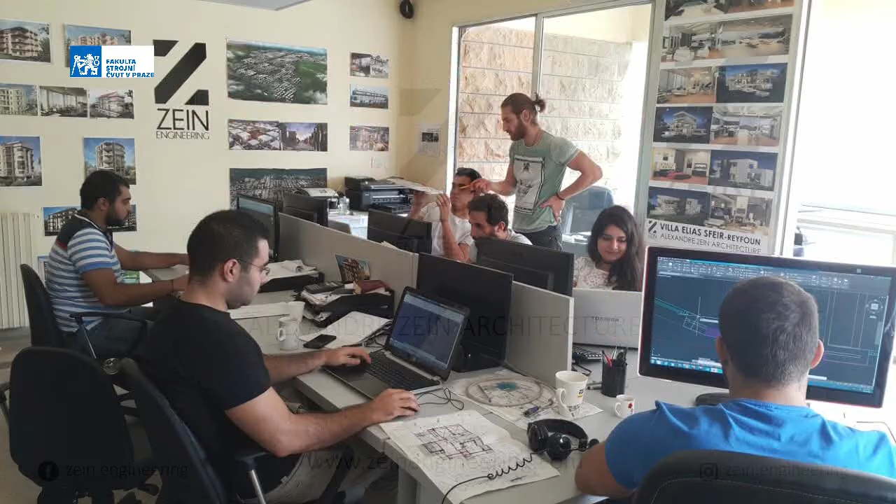As you know, in architecture, having something built is rare. So this is the office in Lebanon. Of course, architecture is never a solo act, so generating a good work environment is vital for a collective team effort. And we fly back 5 years ago. That was me during my graduation project day. Well, I looked so young back then, I still look the same I guess. But this project was the catalyst that woke my awareness about the real meaning of architecture.

That it's not about the physical object. Architecture is about human aspiration and the adaptive response to a need, in a way that the role of an architect is to be able to adapt a selfless architecture to any situation. And it's inevitably too powerful that its impact has the ability to manifest itself to change people's lives. So most of the prevailing flamboyant projects are limited to the small percentage of privileged people who actually have enough money to make great buildings, while the biggest percentage lies on the poor.

Here's the thing: architecture is for everyone, for every single human being. So we need to be able to work with scarce resources and inspire people with smart strategies, as well as give the best out of a specific budget. So in this lecture, I'm going to show you how we responded to several assignments, from a high-end architecture built for the rich to small cottage shelters built for homeless refugees.

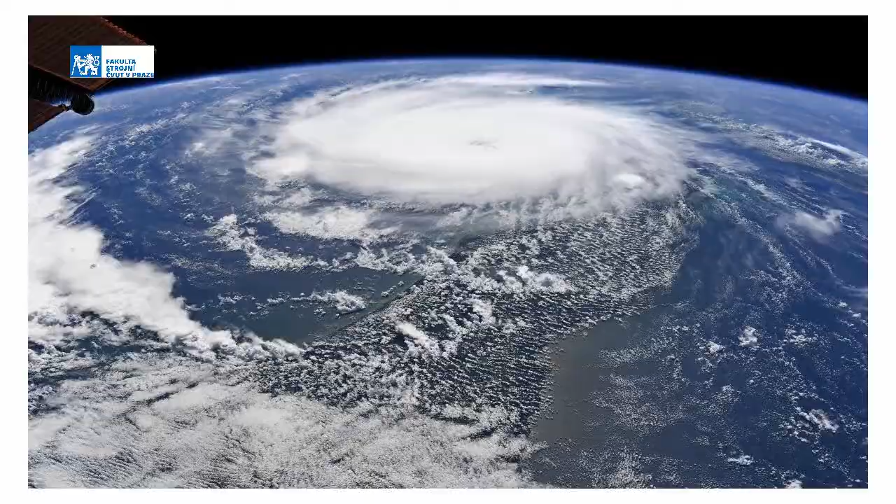So we live in a world that has never found peace. There's always a war somewhere, there's always natural disasters going on. So humanity often faces incidents that disrupt lives, whether it was caused by humans in war, refugee crisis made by conflict policy, or by natural disasters such as earthquakes, tsunamis, floods, etc. And this is a recent example here. This is a photo taken from the International Space Station 2 months ago. This is Hurricane Dorian, considered one of the smallest examples among endless other man-made and natural disasters that caused more than $165 billion of economical loss worldwide.

And the result, we have more than 65 million people displaced in the world, in which 20 million are refugees. And 40% of these 20 million are Syrians. And by the year 2050, it is estimated that the number of immigrants could exceed 200 million refugees in the world. And this is where they live.

Informal settlements, slums. Just imagine yourselves living in here. And the large number of this group, they live in UN tents in which the walls that separate them from the outside is a thin flex sheet that's barely sufficient to protect them from the intense outer climate, so they don't have access to the basic needs and facilities that struggle to provide the simplest aspect, much like what is needed for animals, or even less.

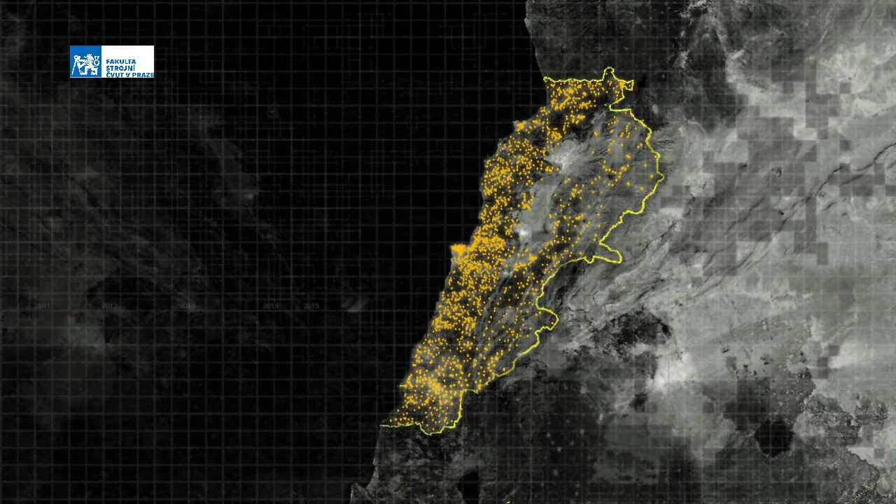So, in that sense, emanating from my senior project in 2015, this is when in Lebanon we faced an influx of 2 million refugees, almost like 1/3 of our population, and we couldn't bear this influx. So I said that this time it's not about the building, it's not a question of a spectacular architectural design, yet it's a question of humanity. And then I thought to myself that if I had to create an intervention for this issue that is seemingly tailored only to Lebanon, we're going to be facing the same problem over and over again in some other parts of the world. That's why we introduced systems in architecture, and these systems, they don't belong to a particular place, yet they adapt to belong to the whole planet.

So 2 years later, we won the Project Earth 2 competition. We were asked to imagine these refugee camps as the cities of tomorrow somewhere in Europe, almost like a changing structure that would grow, adapt, and develop, and to break the isolator lines separating both communities.

We did an intervention in East Germany, since it suffers the collapse of communist-era industry, which sent employees, especially the youth, fleeing westwards, with a sharp decline in birth rate and an average age surpassing 45. So the smallest communities are bleeding residents, thriving for inhabitants. Simultaneously, Syrian refugees are thriving to inhabit somewhere, so it's a win-win situation.

So the idea is to weave both communities by creating an open settlement that will allow refugees to build their own settlement, their own environment, but of course they have to follow guidelines and sets of construction rules given by the encoded system.

The project must be implemented in a vast agricultural area, not far from German communities and forsaken factories. It was sited in Weimar, Thuringia, since it's relatively fertile, and 48% of the surfaces are used for agricultural production. It's also in proximity to leftover infrastructure and forsaken factories, so there's a sort of reclamation of post-industrial landscapes, where refugees squat these leftover infrastructures to bring them back to life.

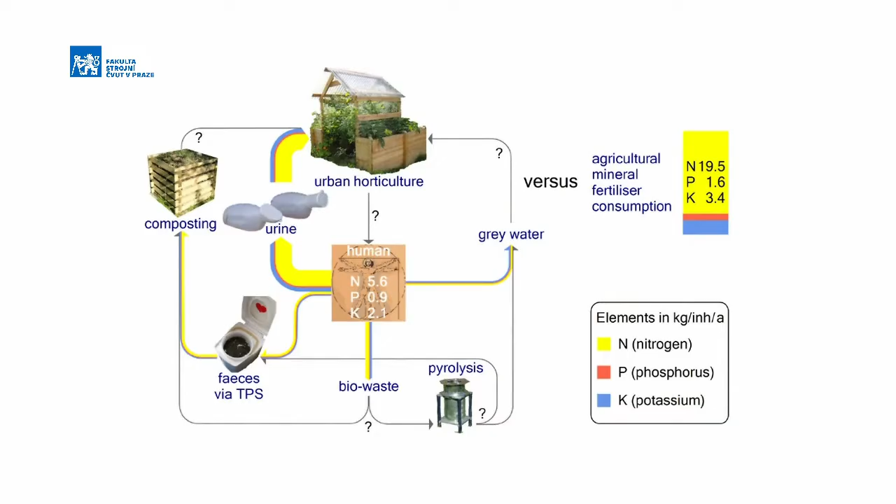So we have a core and four plug-ins that float in an uplifted structure, so we can protect the shelters from flooding, reserve space for infrastructure, and keep the land safe for future uses. We also grow some perennial plants that will repel mice and small animals.

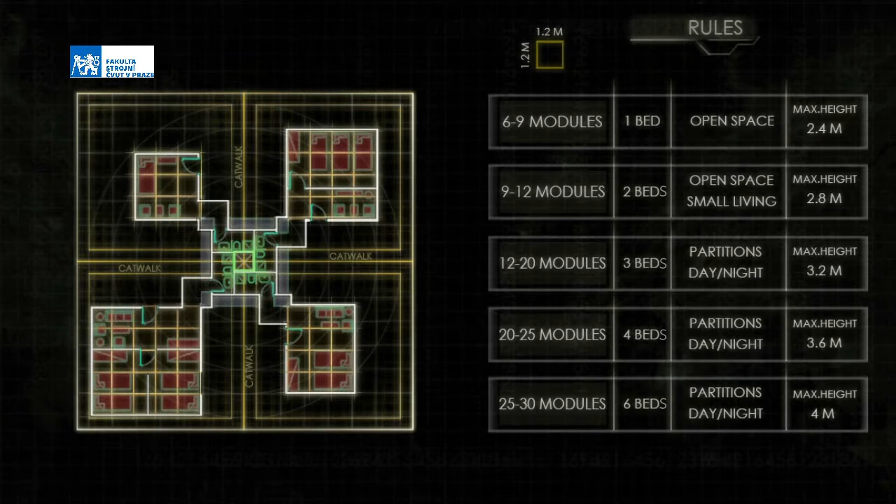These are the rules and standards we encoded, which refugees shall follow while building the shelters. For example, 6 to 9 modules is for 1 bed for 1 person, 9 to 12 for 2, it's an open space, and so on. In that sense, we can simulate an infinite number of typologies that could possibly be built by them. So we never designed the shape - we actually designed the process that would generate the shape.

I firmly believe that studying the way nature solves problems will give us a lot of answers. That's why the structural element used for the skeleton of the shelters are bamboo canes taken from nature, since they're strong, cheap, lightweight, sustainable, and flexible.

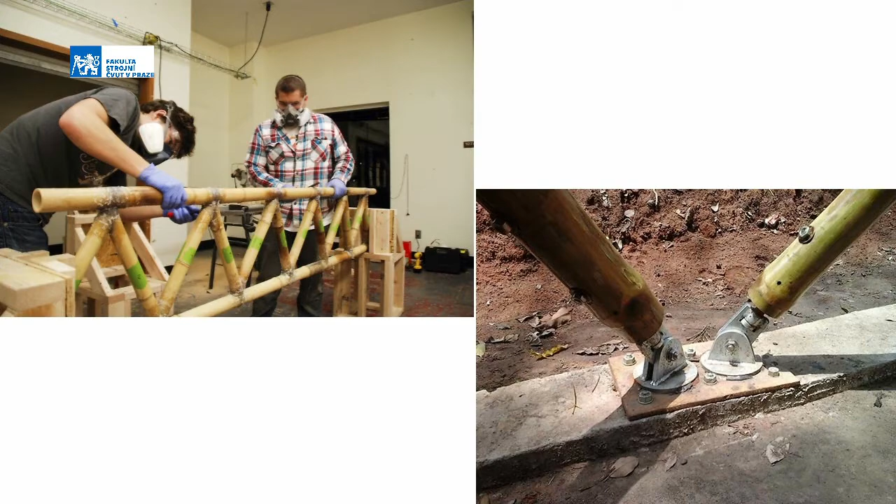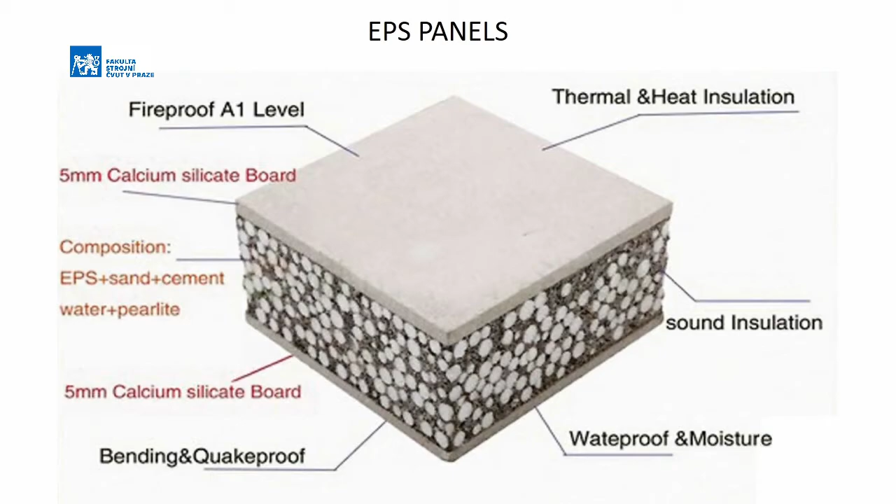But of course we have to treat them, encode them, so they can be easily transformed and modified. As for the walls, we use lightweight EPS panels, since they have some structural capacity, insulate well, and are sustainable. For the furniture, we use recyclable reinforced paper panels.

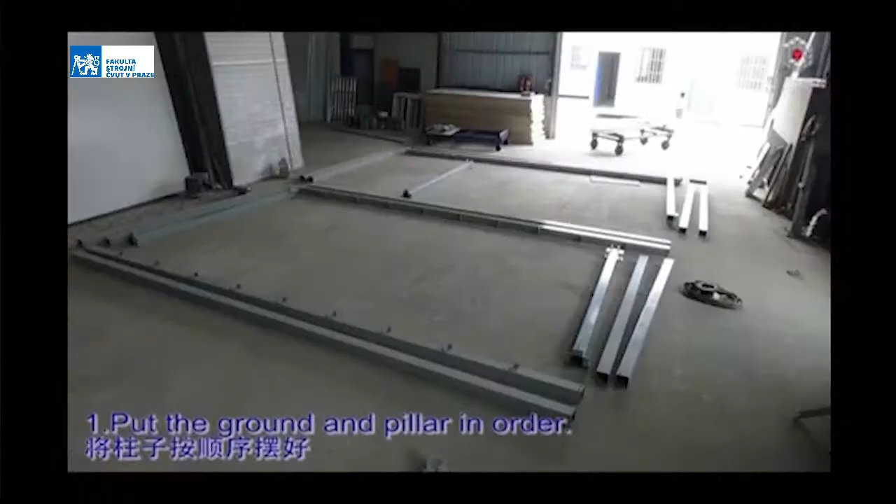So the construction of these shelters is very easy - it's just like building a tent in a forest. What's really interesting is that it can be built in one or two days, so they can cope and rebuild immediately, and get back to their own resources to maintain regular life and social functions.

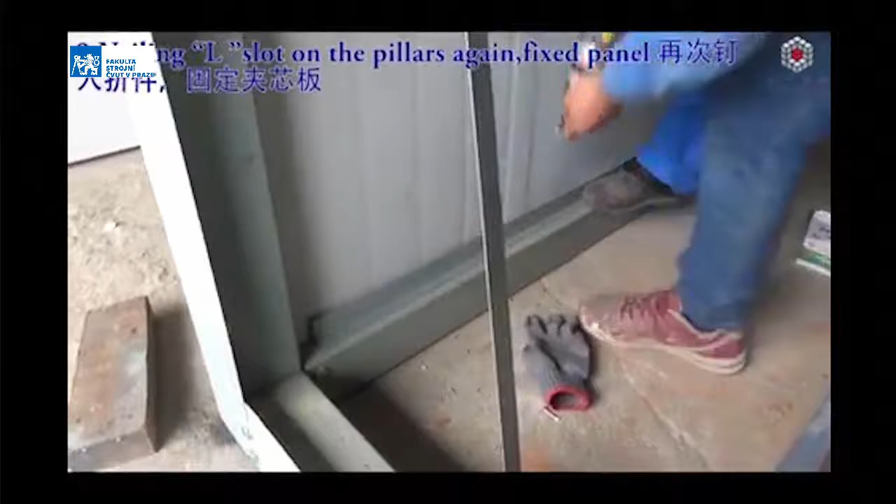As you can see, they build the columns and beams, then add the sandwich panels in various forms and different materials and ways, leaving places for openings, doors, and windows. We provide the refugees with all the materials and tools, and they just assemble things following the guidelines.

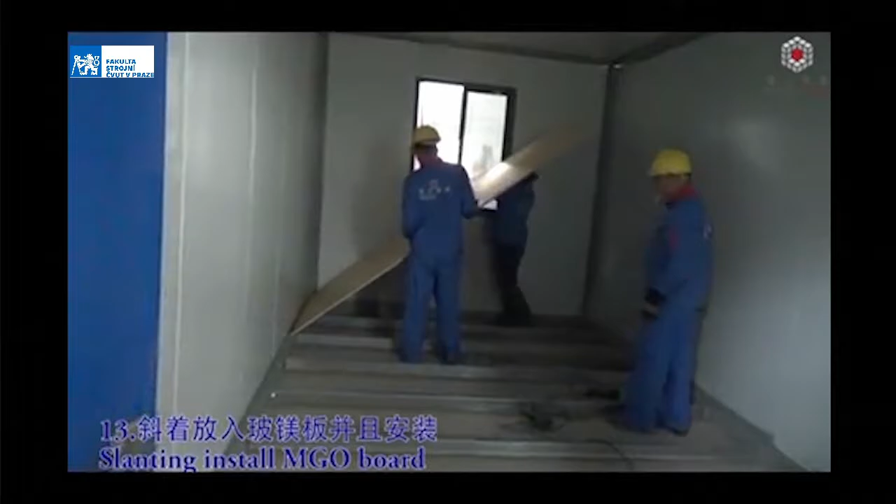But there's also this important phenomenon called schooling - refugees learn easy techniques in a socially active manner. That's essential, so there'll be a sort of corps of trained builders that will train others, and then the system will spread.

So it's a permanent temporality instead of a temporal permanence. So for a precarious population, you need a theory for the growth and for the shrinking so we can delineate the matrix. So we use the theory of fractals, because it describes the theory of nature as a self-organizing system.

This is when we explore the same pattern in different scales. So the part looks like the whole. It's like a never-ending pattern.

So in that sense, we have the cell, we have the core, and 4 plugins. We have 4 families, which makes it a clan. So by simulating 4 clans with another core serving 4 clans, we'll have a sub-tribe. And 4 sub-tribes will give us a tribe. And 4 tribes will give us a confederation, and so on.

So it's a never-ending pattern. Part looks like the whole. You can see the same cell in different scales.

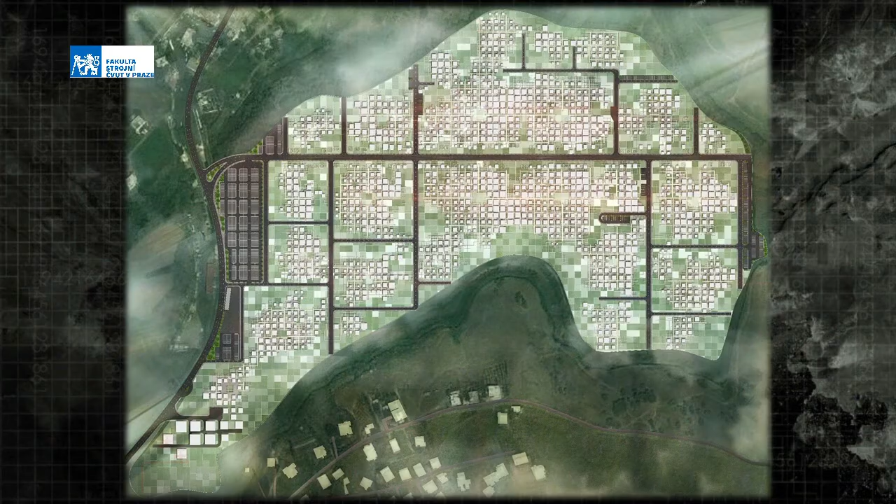And of course, the result is you have different clusters with different proportions in the constellation, leaving sort of negative spaces where refugees harvest their own food, produce their own agriculture, and have some sort of businesses. So we can never say this is the final shape or final output of the master plan, because it's continuously changing. But of course, we have rules following it.

So this is the project from the bird's-eye view. And it's a self-sufficient settlement. It has to comprise all the needed functions for it to survive. So you need schools, kindergartens, commercial shops, health centers, etc.

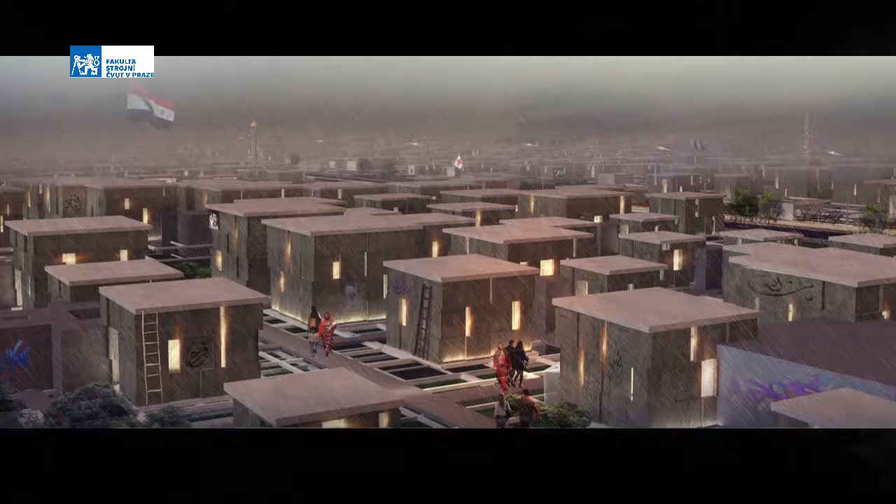And as you can see, we're still building for the poor. We're building for homeless and hopeless people, but still we find aesthetical and spatial qualities. So it's as valuable as an ultra-expensive building. This is our role as an architect: to give the best for everyone.

So the aim was to revitalize the place that once used to be a public destination for medical services, without mislaying its actual function, which is the parking lot. And they asked us to create a greenhouse on it so they can harvest medical plants.

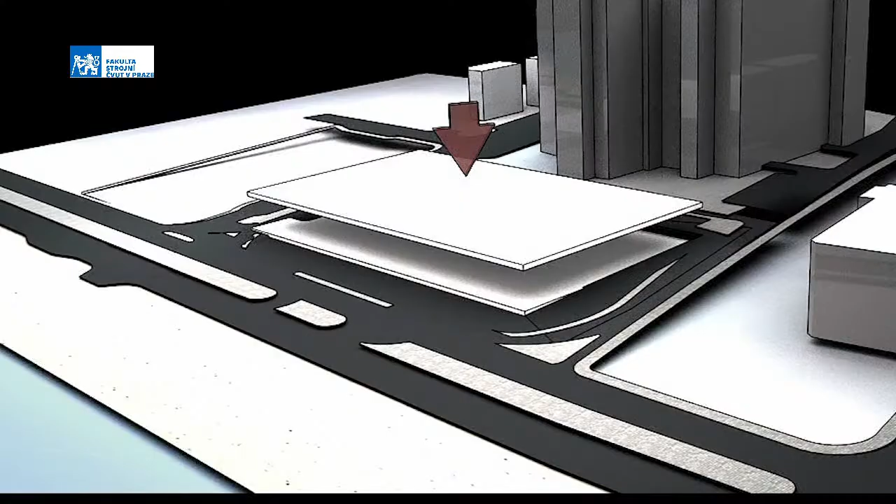So we thought that instead of keeping the same structure as is and trying to establish a public space that doesn't actually blend with the parking lot, the idea was to shift the whole structure to the underground, leaving the ground level freely open to the vibrant city.

In a way that the public space and the gardens and greenery will be mixed together under one canopy, so a microclimate shall be created inside these spaces that are leveraging the connections to the city. So we got inspired from a plant cell.

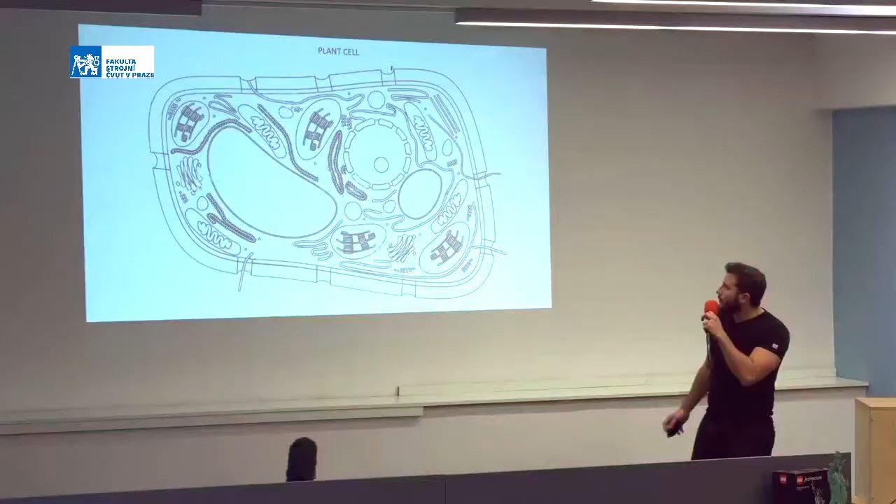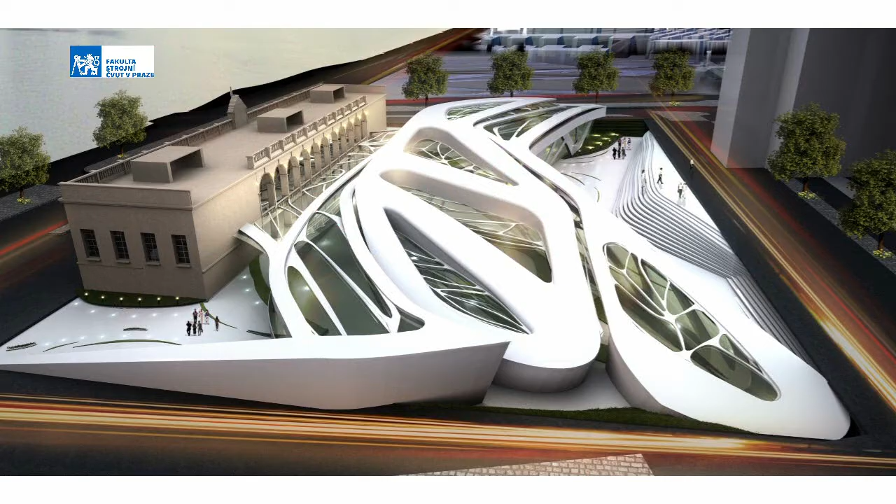Inspired by the cell, the future projects itself from the old arches, creating some sort of contrast between the old and the new. And the perforated canopy blatantly retracts itself to create shades for the pedestrian on one hand and direct sunlight for the plants on the other hand.

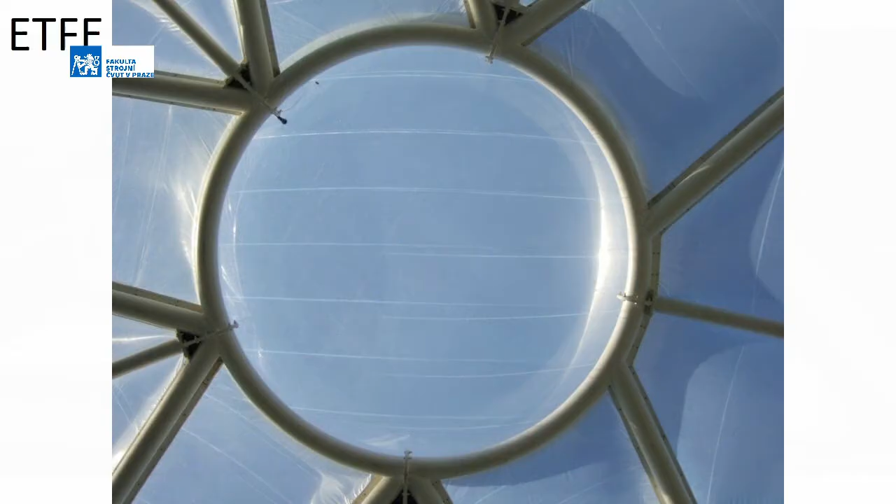So we didn't use glass. Instead, we used a high-strength polymer, which is 1% the weight of double glazing, so it adapts well to the high temperatures of Kuwait.

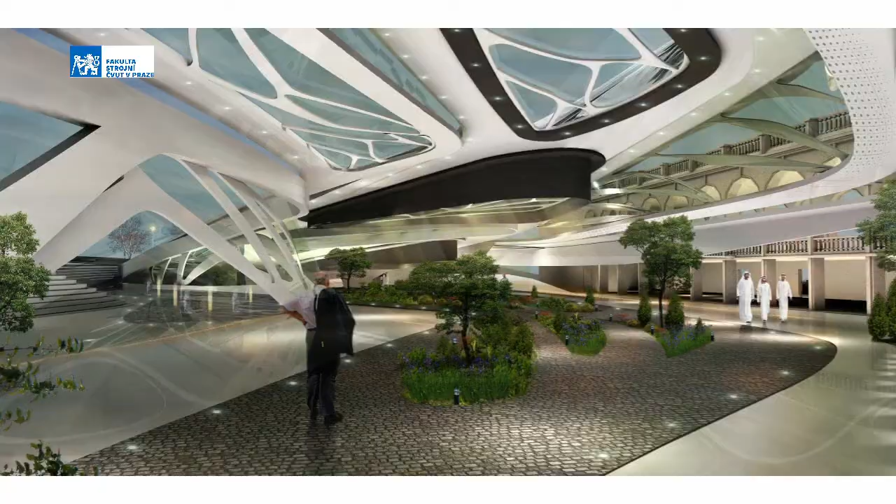So the metabolism of the project provides the end user with a natural microenvironment and delicate spaces in a way that people could meet and walk and sit amidst thousands of trees and plants, and they're going to be healthy and happy and comfortable. And now we're working on the construction documents of this project.

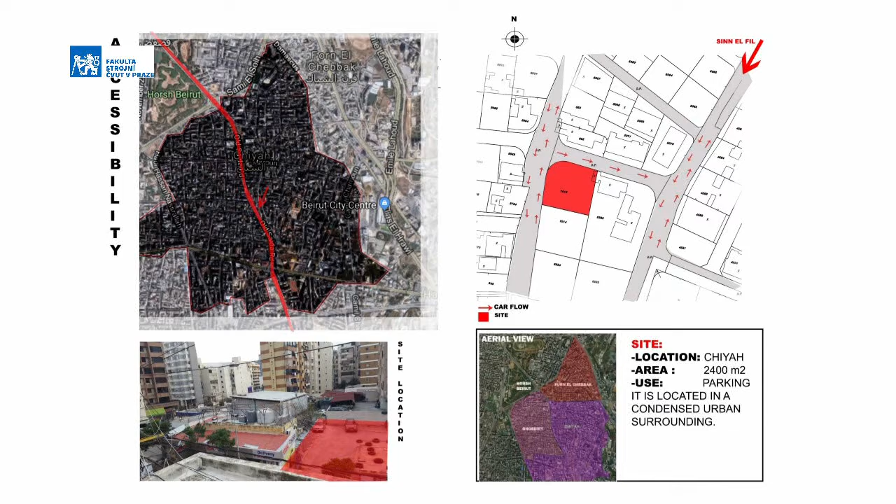Moving on to Lebanon, my country, particularly in Beirut, the capital, in a very dense, bustling district called Chiyah Ain Rumane. This area faced 15 years of war, resulting in devastated and unfinished structures. In the last decades, investors attempted to replace these structures with commercial residential blocks, and the result is that we nearly have 2% of greenery in the area, with a very high level of pollution and no public space. Usually in Lebanon, private space always remains private.

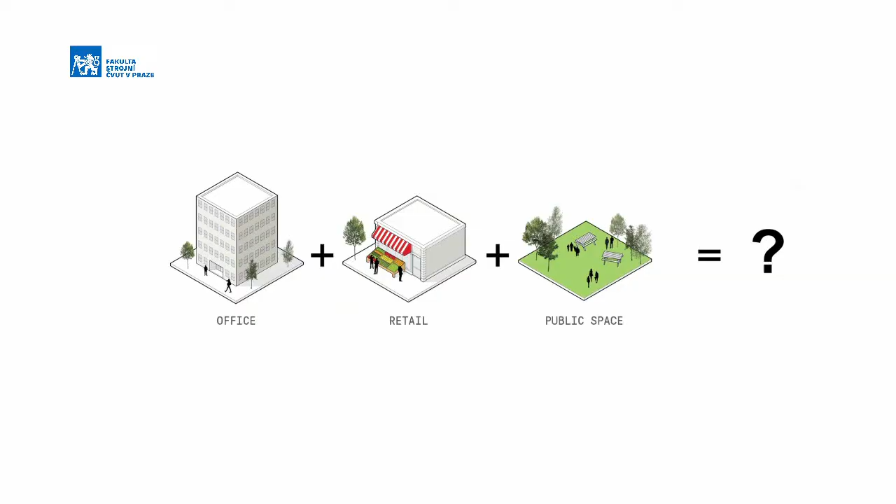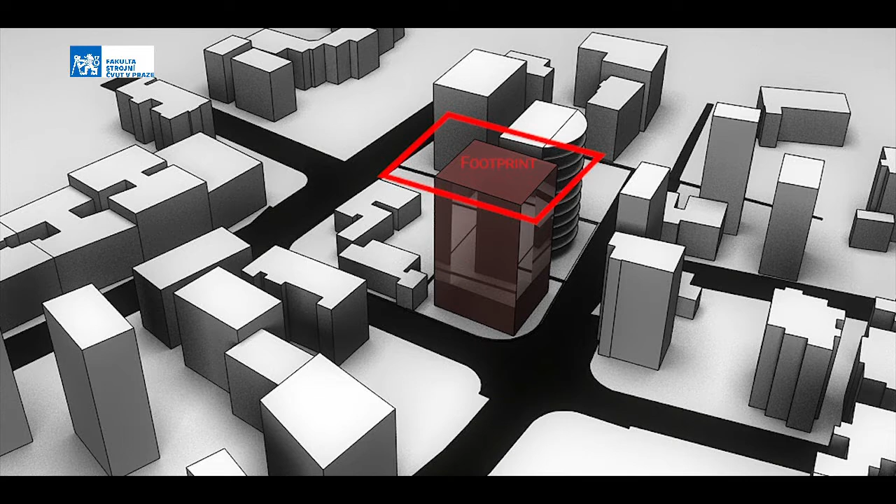So in this case, we miraculously convinced the client to create some sort of public attraction by introducing retails and coffee shops, as well as gardens on the ground level and offices on the first and second floors. Instead of taking the maximum footprint like investors do so they can have as many apartments as possible, we minimized the footprint and went higher. By going higher, you can benefit from the amazing views of Beirut, and you can also have negative spaces for public attraction down here.

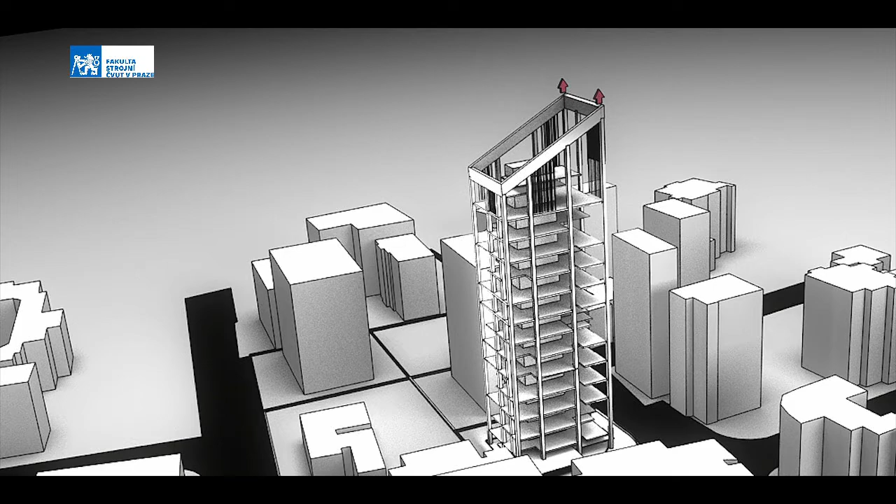In order for us to retrospect all the unfinished structures of the area, we brought the structural elements to the extremity to be part of the architectural design. In order to neutralize the excessive exploitation, we subtracted parts of the nude slabs, creating motion across the facade and double levels for the greenery. On top, we deviated the structure so it could remind us of the resilience of Ain Rumane. So a simple, rational building has greenery that surpasses the 2% of the district.

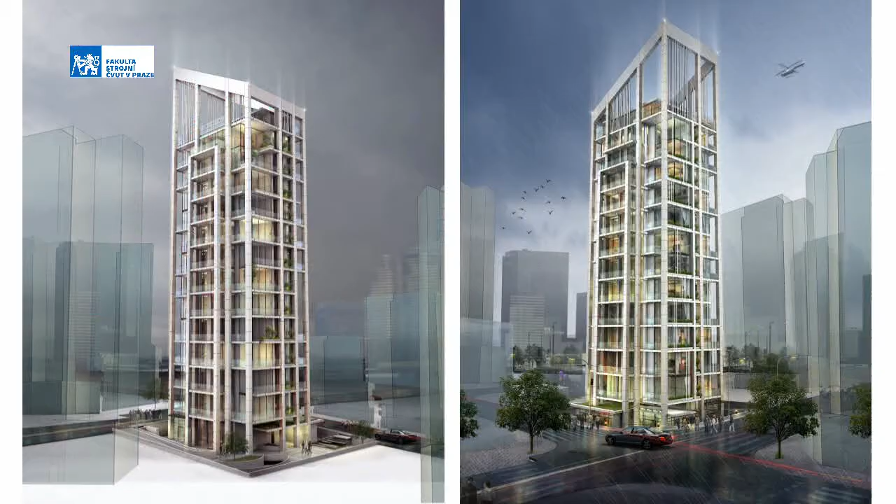As you can see, this is the building, and this is a rendering. The building imposes itself as an inspiring landmark element that brings positivity to the context. As for the structural elements, we cladded it with ACP panels so we could give it a strong character that would remind us of the period of our time. We recessed all the glazing systems in a way that the winter sun goes into the apartment, while the summer sun creates shades within the apartment. So these nude slabs outside act as shading devices.

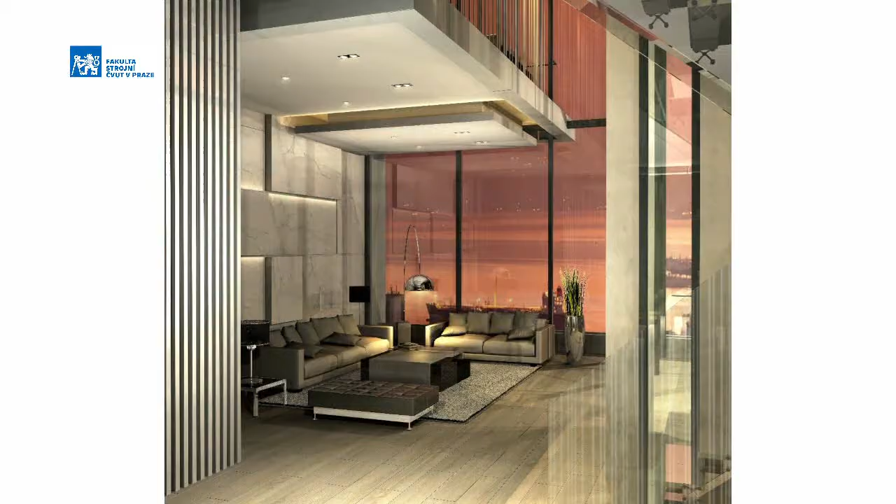You can realize the connections from the inside out, how we connected the apartments to the amazing views of the Mediterranean Sea and the amazing views of Lebanon and Beirut. Now you can see how beautiful Lebanon is.

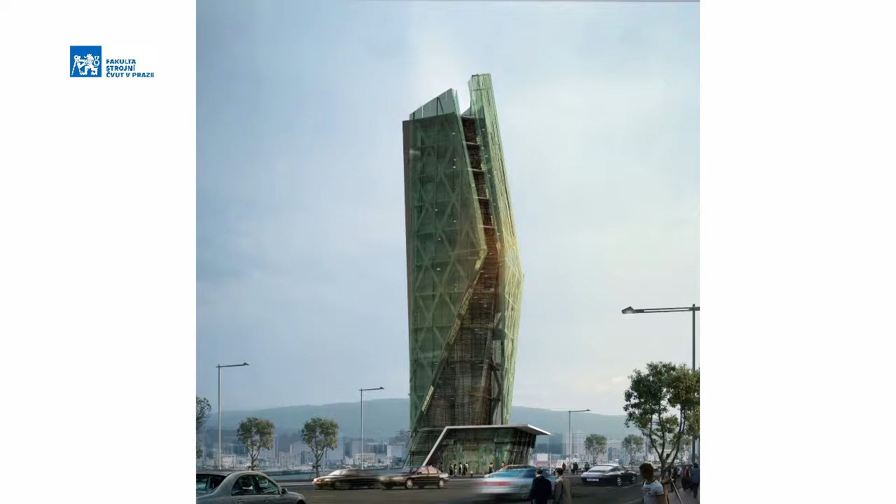We had another project in Beirut, in the heart of Jdeida. We had an office tower for a client that was asking for glass towers. It infuses the street with a muscular skeleton element that is fighting gravity, giving a sort of dynamism to the street. You can realize we have a double skin, with this bracing structural white element combined with the glass system. It has more than 100 offices, corporations and companies overlooking the amazing views of Beirut and the Mediterranean Sea. So architecture is an anecdote in which a process generates the final outcome.

We also had the opportunity to design a dormitory project for Notre Dame University in Zouk. The aim was to pragmatically separate the private study zone from the collective, common study area where scholars can meet and work together.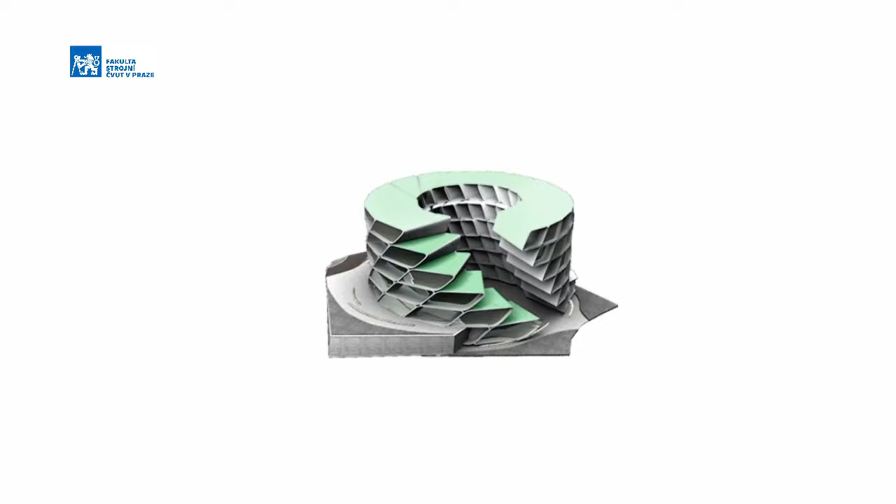In a way, we're living like gardens on each level. We enlarged the ground floor so we could attract the public, and we have some retails on the ground level. You can realize the scale of the car against the scale of the building, and the dynamism behind it.

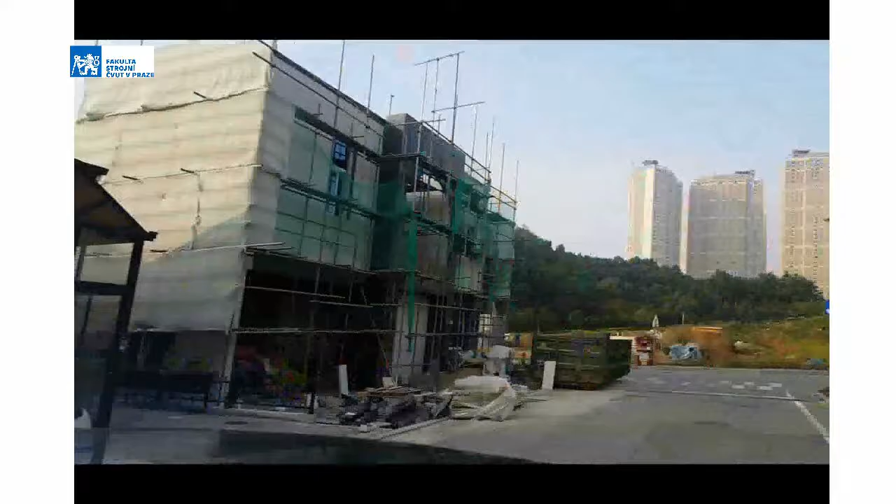We also had a small project in South Korea, particularly in a very quiet neighborhood in Seoul, surrounded by contemporary private houses. We were asked to create 3 lofts, the biggest of which is for the owner. Of course, we had to respect the surroundings, the context, and the cultural tradition of Korea. This is the site — 600 square meters, very small.

So the built structure is sort of reminiscent of the Chinese sharply curving roof that was modified in Korea into a gently sloped, sharp-angled roof with strong lines and steep planes, inheriting some kind of quiet inner harmony and exhibiting some kind of naturalistic tendencies with avoidance of excesses.

So we created this Korean house with a sharp-angled roof, and then we divided it into 3 lofts, in which the biggest one is for the owner and 2 small ones for rental. Then we perforated it for sun access, and the negative space here in the residual space was left for technicality and sort of a walkyard.

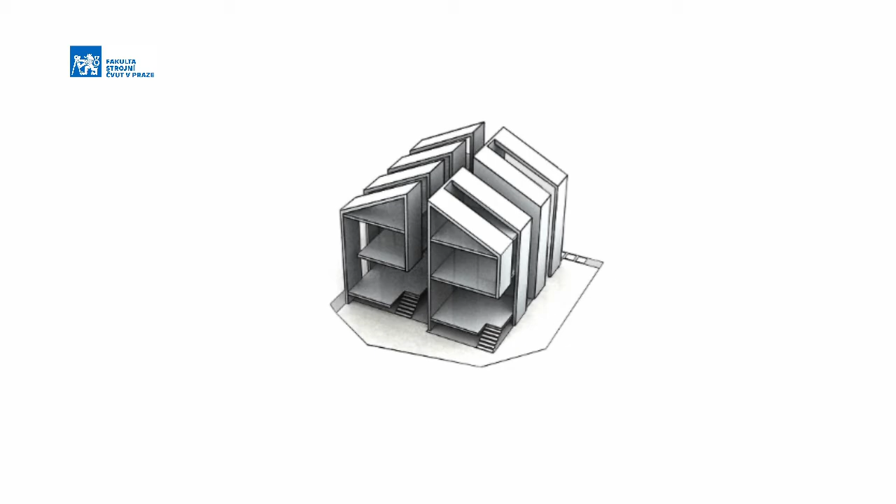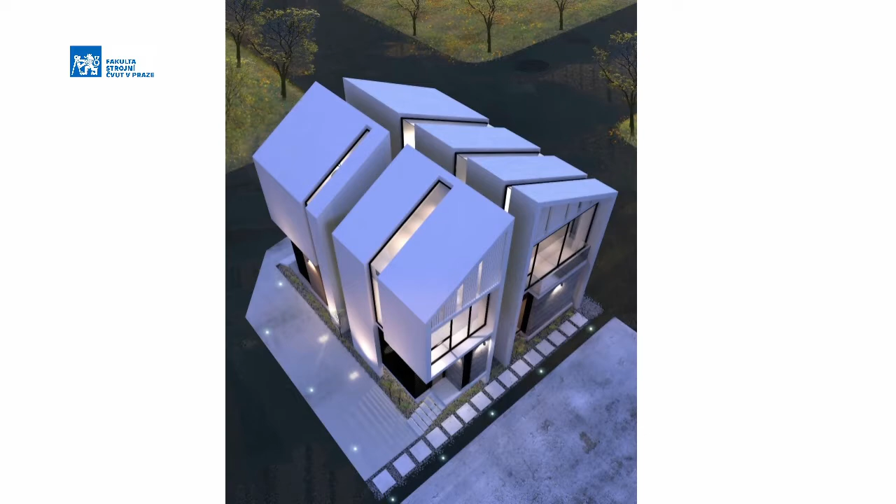And then we created the floors and uplifted the ground floor. So we avoided the excesses by creating a pure form with pure white material, and we enhanced the transparency. So we tried to respect the context and cultural tradition, but at the same time it has some sort of bold and audacious attitude compared to its surroundings.

So this is the plans. On the ground level, we created a compacted reception area, and the private zones were left on the 1st and 2nd floor. This is one section, so it's a very small, compacted project.

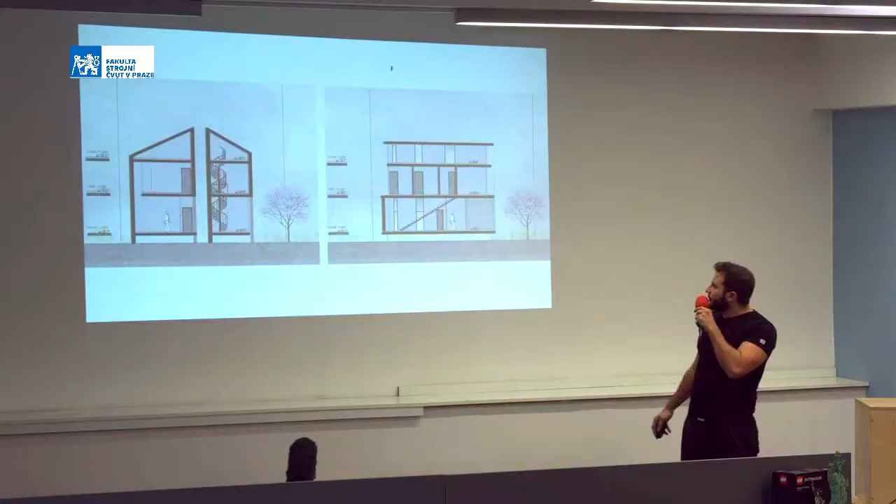Architecture is really about the place and the people you're building for. It has the ability to affect, to transform, whether through spaces like this, or building, or even a swan.

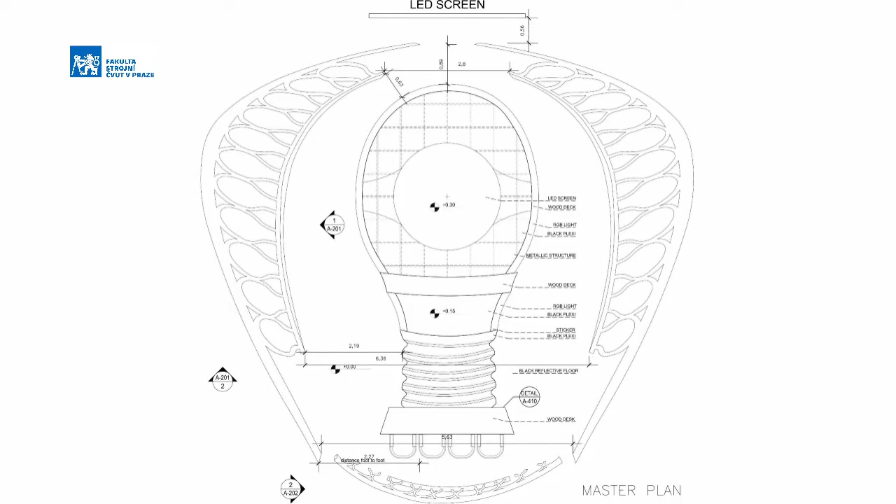The idea behind the set is to introduce the tungsten lamp that represents the idea pop-up. This lamp became the main platform of the studio. Down here on the bottom, we've got the jury table, considered as the electrical pulse that evaluates the ideas. On each side of the lamp, we have 2 wings with multiple dispersed lamps of various scales that represent the variety of ideas.